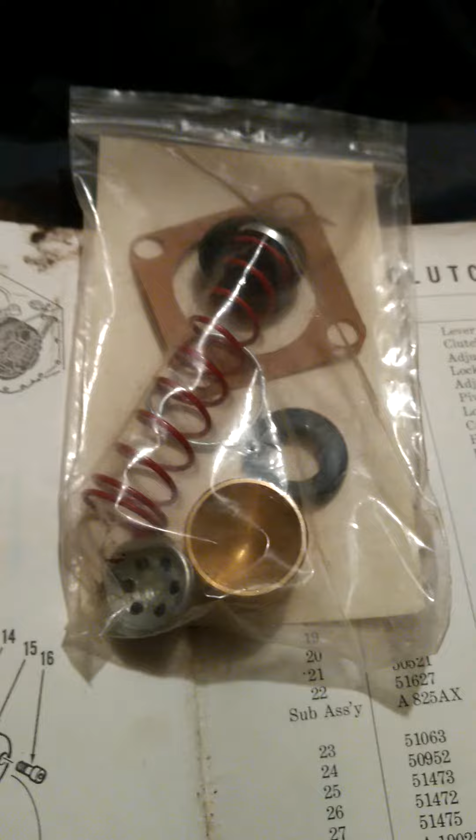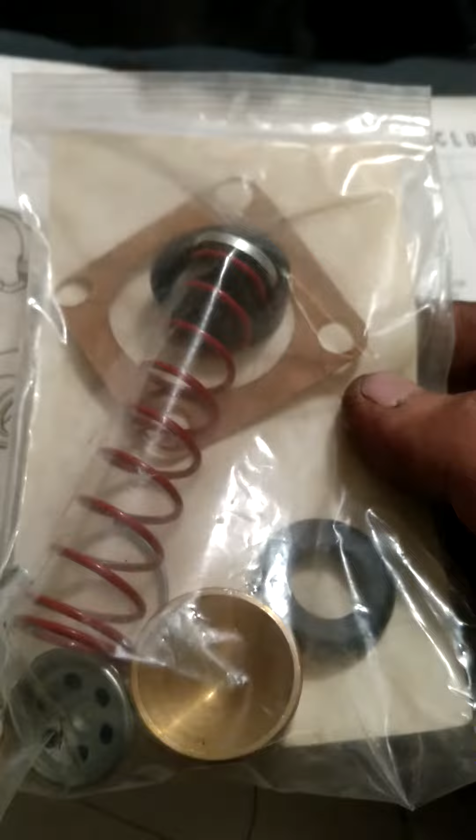On the gearmatic, the winch master control, this is for my 119 on the 76 John Deere. You can get these at Broken Arrow, and they charge a bloody fortune up here in Canada. Maybe in the States you get a better price, but basically $200 for a pair of these.

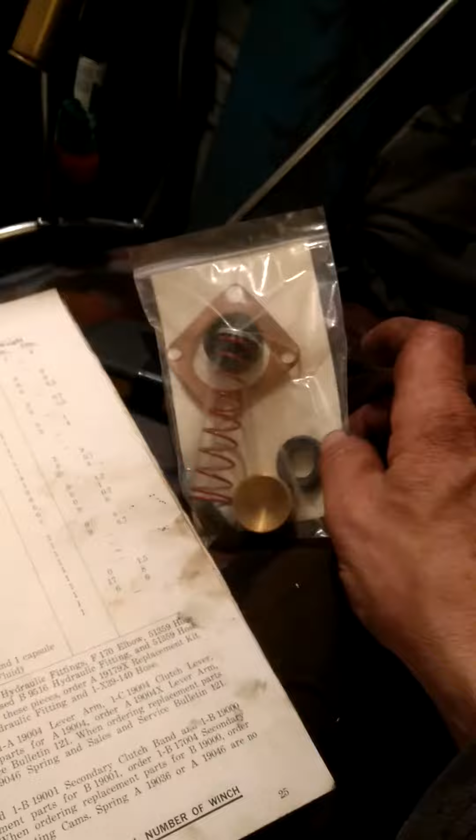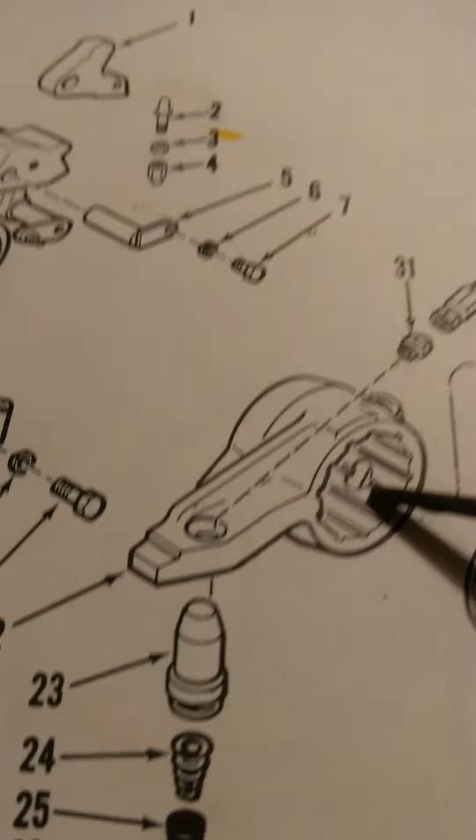So anyway, it's good to rebuild your winch master control first. The servo that's inside of the clutch is here, you see the line that goes onto it. Now my choice of grease is 1200-2 Lubriplate, it's white. You see inside of here, part 22.

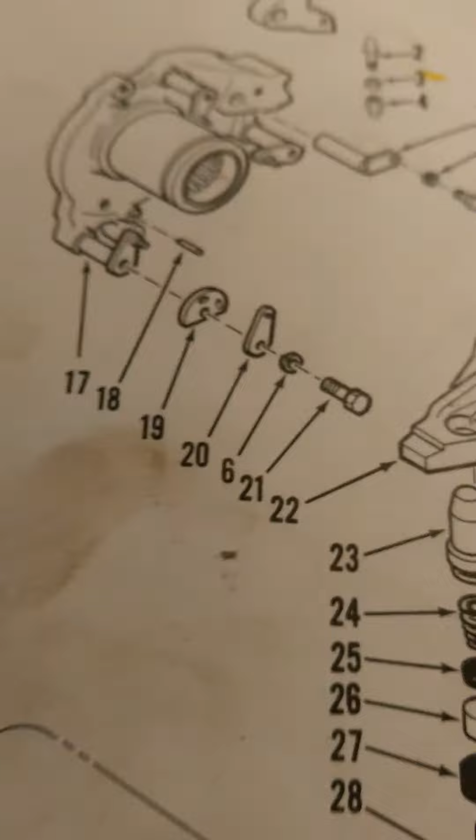I took a pocket knife and scraped inside this thing completely and down all the grease carrier grooves. It doesn't have a grease nipple or anything, but this is the first and basic moving part of the clutch. When the clutch is sticking, I tore off all the pieces down to this one, then cleaned and lubricated it properly, cleaned this one down to clean bare metal on the outside around it, part 17.

It's attached to the spline of the drive. That way, if this is first moving correctly in the sort of moon shape like it's supposed to do, like an ice skate,

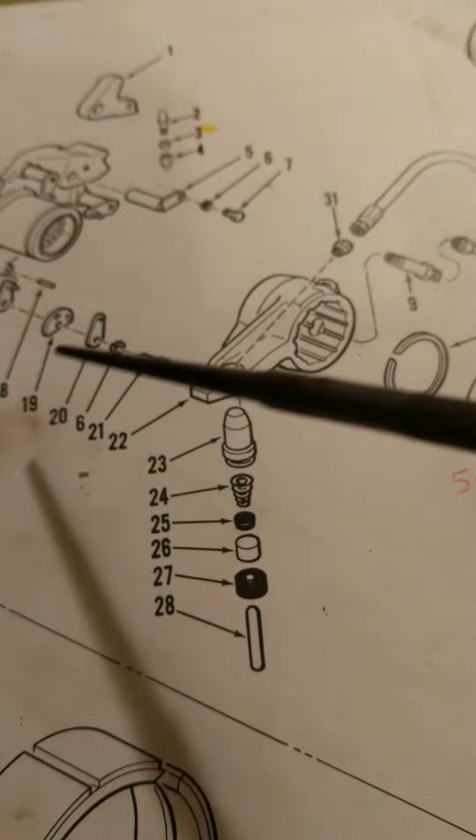the part 19, the adjuster cam, sits in the primary shoe in this groove. This groove gets rusted up, and so does the edge of the cam adjuster.

So I took a hacksaw blade that was broken and arced it slightly, and then used it to scrape really heavily both sides inside, very squarely, so the groove was just shiny.

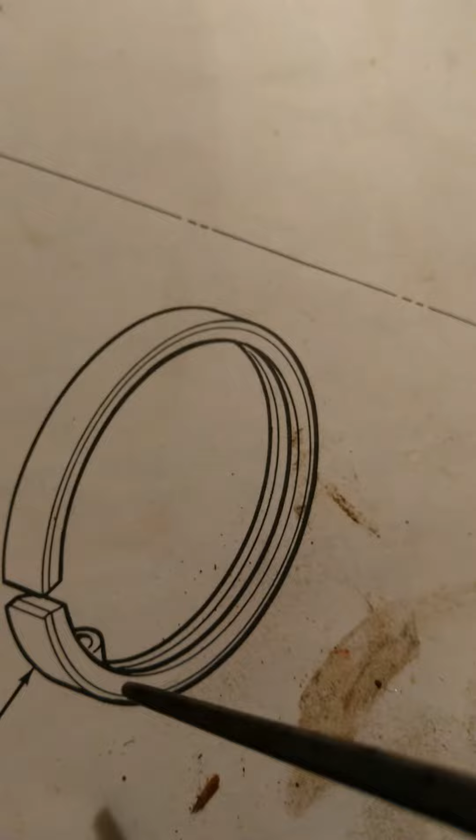And I made sure that I cleaned it past where the full amount that I could see the movement is, that it moves. I went past that by probably 2 inches that I scraped, because when that thing really bites down, it can't stretch that far.

But I want to make sure that there's nowhere that it's pinching the adjuster in the groove, because that's what was holding it locked up.

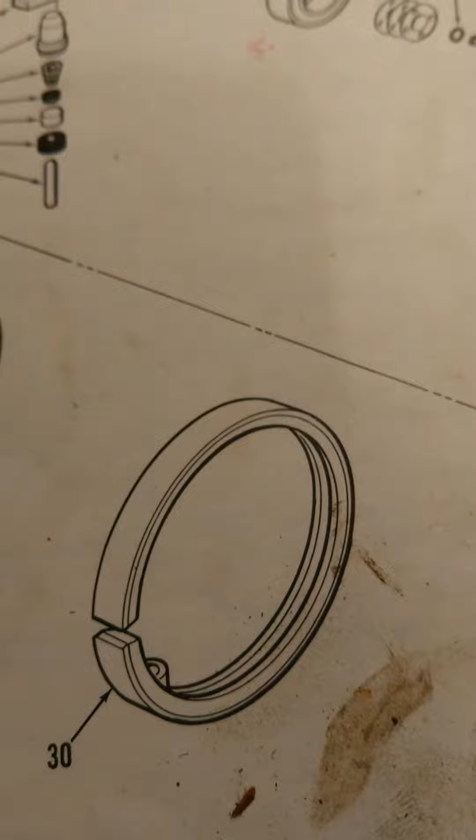And due to the varying responses of the winch load, it depends on how hard the clutch will bite. So you have to remember, sometimes you won't bite the clutch down as hard as other times, and it'll seem like the winch is working okay, but it's still got an adjuster stick problem.

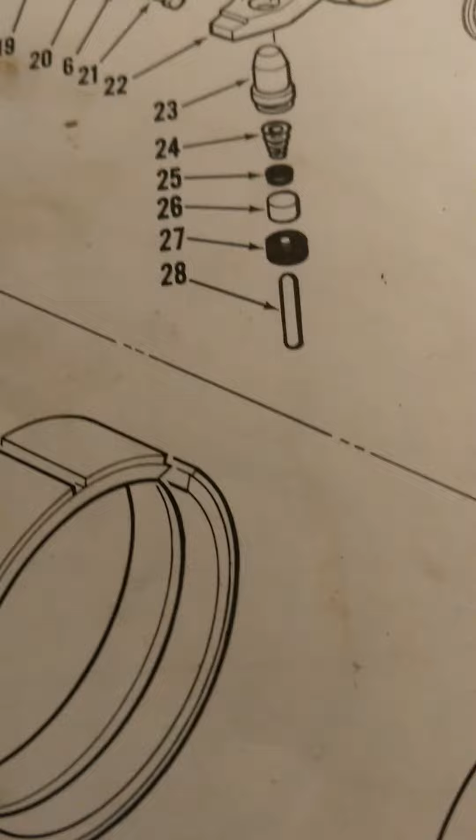Hacksaw blade width for a clearance around the outside was about the right amount, and for the brake band around the outside of the drum, it was maybe 10 thousandths or something that they called for in the book. I think I set it up close to the hacksaw blade width for clearance.

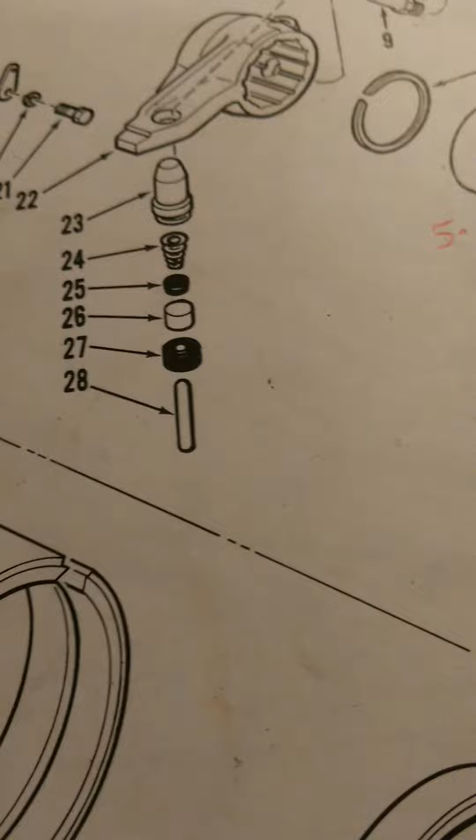Never-Seez inside this was a problem. It just made a paste and it made it tight and pinchy. As I added parts one at a time until I got to the adjusters, then I found that that's what was locking it up. But basically, the bearing, that's this end support, could give problems with continued adjusting problems if the bearing's shot.

They're not hard to get. It's not bad to take this thing apart.